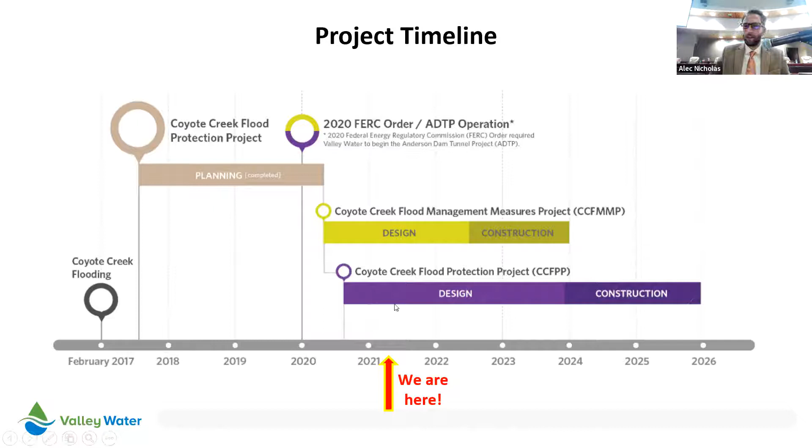So in the planning phase, we had several steps. The original was the conceptual alternatives analysis. We solicited public input and revised those into the feasible alternatives, which we presented to the public and solicited public input as well. We further revised those into the preferred project, which we presented in 3 different public meetings in June of 2020, last year.

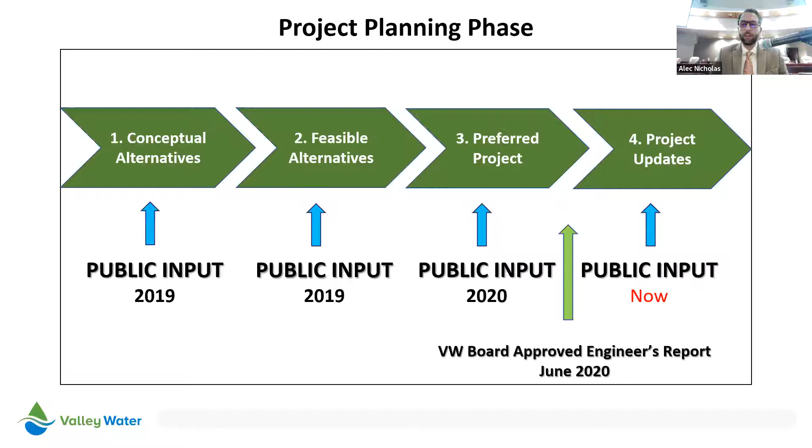Afterwards, on June 23rd, 2020, the Valley Water Board approved the engineer's report, and we have since begun the design phase of both projects. Today we'll be soliciting input on the current project updates and providing additional updates as we move forward.

So a quick recap, the Valley Water Board approved the engineer's report in June of 2020. Since then, we have also hired an environmental consultant, GEI, and a design consultant for both projects, AECOM, whose project manager I'll be introducing later. We have continued to work with multi-agency staff regarding other projects affecting the creek.

One notable agency is the City of San Jose, coordinating with their Coyote Creek Trail project. We have begun the preliminary design activities, including obtaining permission to enter from affected property owners who have flood protection elements adjacent to or potentially on their properties, in order to begin data gathering activities in those locations.

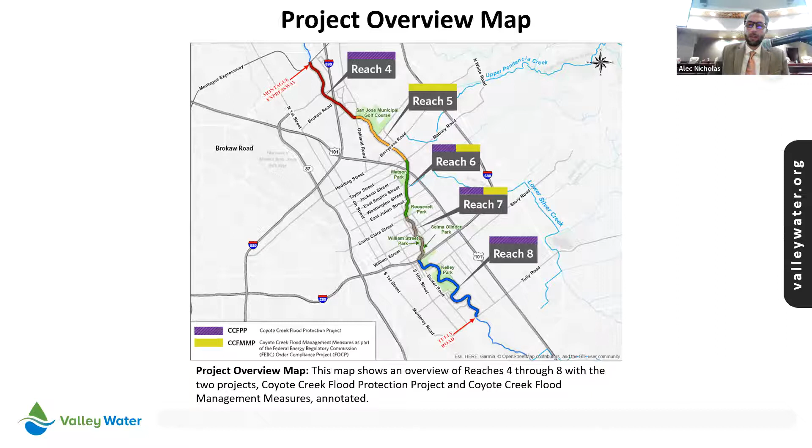So a quick overview of the project limits. The downstream limit is Montague Expressway, and the upstream limit is Tully Road. We have split the overall Coyote Creek project into 5 different reaches. Reaches 4 and 8 are noted in purple. All elements in both these reaches fall under the Coyote Creek Flood Protection Project, with a completion date of fall 2025. Reach 5 elements are all in the Coyote Creek Flood Management Measures project, which has a completion deadline of December 2023. And lastly, reaches 6 and 7 have a mix of elements in both projects.

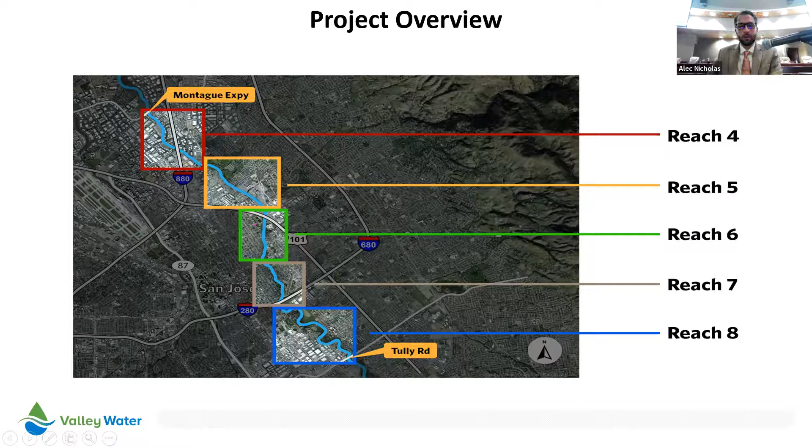Now we'll be delving into each reach a little bit to discuss some specific details. Reach 4: here we'll be using 2 flood elements. One, a flood wall that we have in orange on both banks, and across the roadway surface of Charcot Avenue, we'll be using a passive barrier.

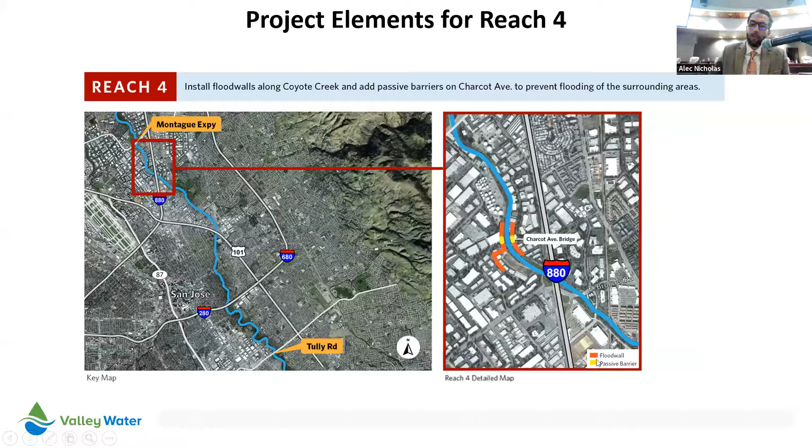Now, what is a passive barrier? It's outlined in yellow here, with a picture on the right-hand side. These normally lay flat across the roadway for cars to use the bridge. But during a flood event, as the waters overtop the bridge, the barriers will flip up under normal buoyancy forces and prevent the water from going up and down Charcot Avenue. The passive barriers will also be connected to the flood walls, both upstream and downstream of the bridge, to provide continuous flood protection in this region.

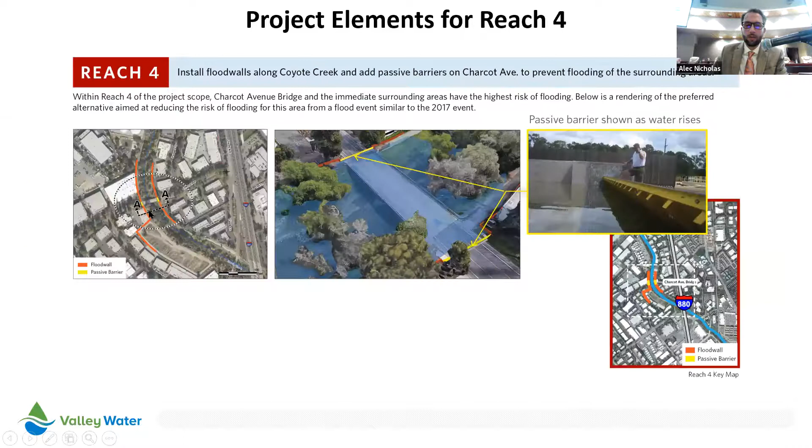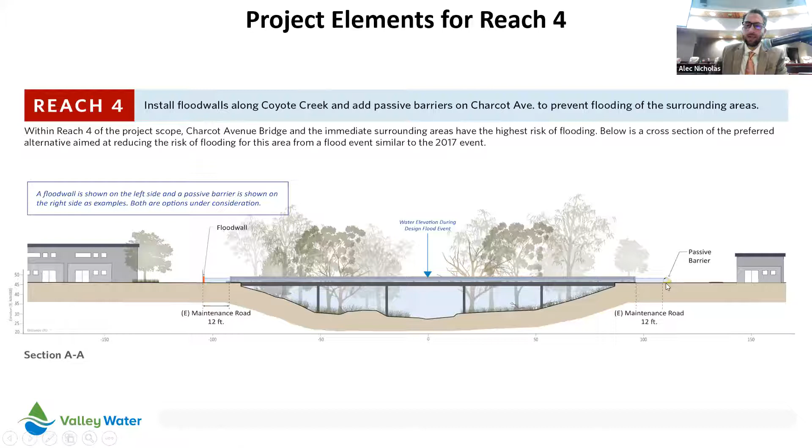Here's a cross section depicting what we would see if we looked downstream at Charcot Avenue. So we have the bridge, and we have depicted the flood wall on the left-hand side. This would occur before and after the roadway, not across it. Then across the roadway, we would have the passive barrier, shown in yellow on the right-hand side.

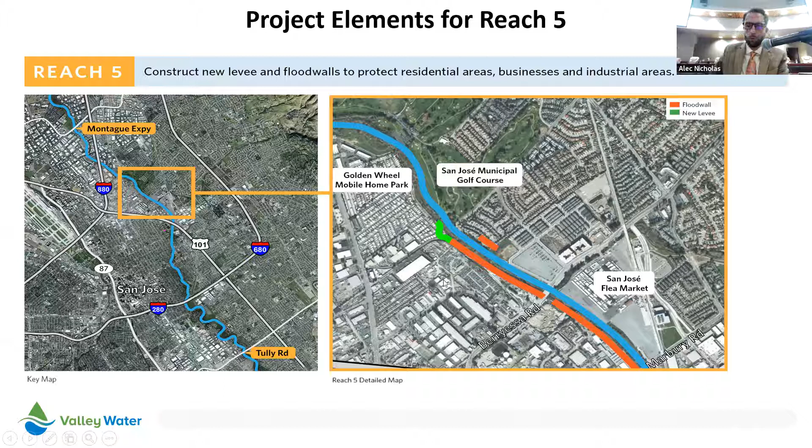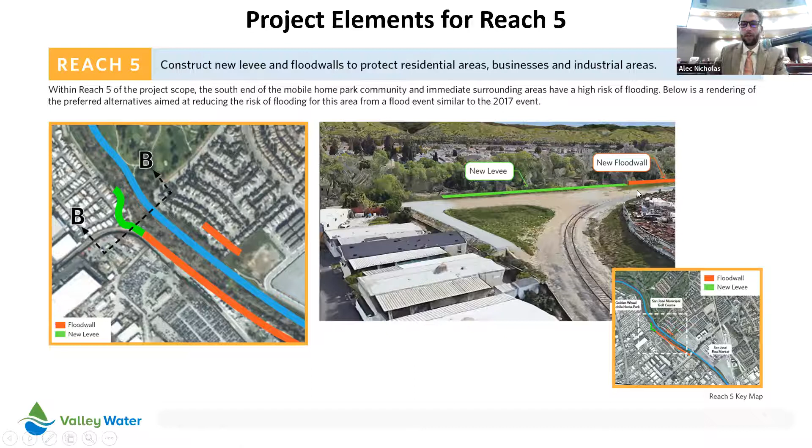Here's another rendering of where the new levee would go. The Mobile Home Park is on the left-hand side of the screen, and it'll be tied into the new flood wall going further upstream on the west bank along the UPRR tracks. A cross section in this location shows the new levee on the left-hand side, with the proposed water surface elevation, and the short flood wall providing protection to the residences along Notting Hill Drive on the right-hand side.

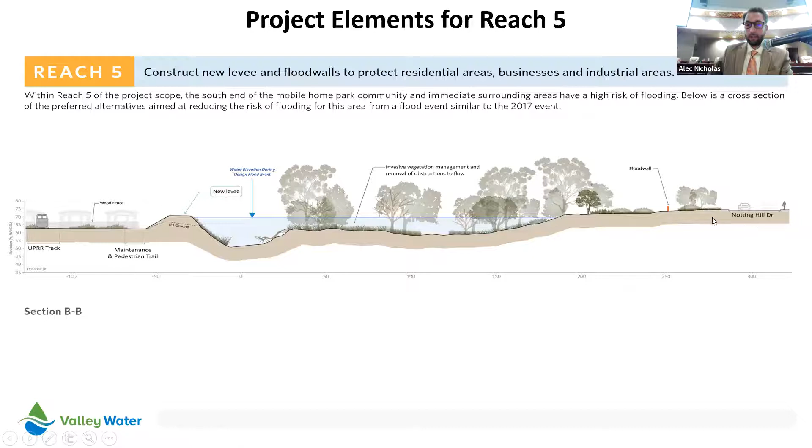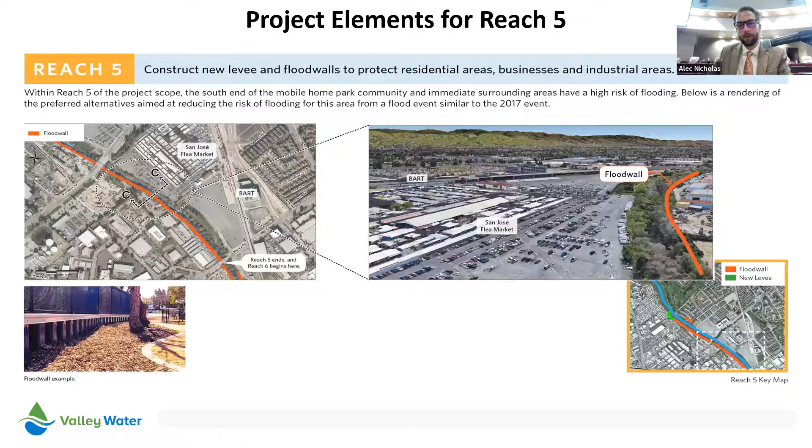A little bit further upstream, still in Reach 5, we have additional flood walls along the west bank of the creek. This is across the creek from the San Jose Flea Market and the BART station, and a proposed potential flood wall type is shown in the bottom left corner. For the eagle-eyed viewer, this is something many would recognize from Reach 8 near the Rock Springs neighborhood that Valley Water implemented after the 2017 flood event as an interim protection measure.

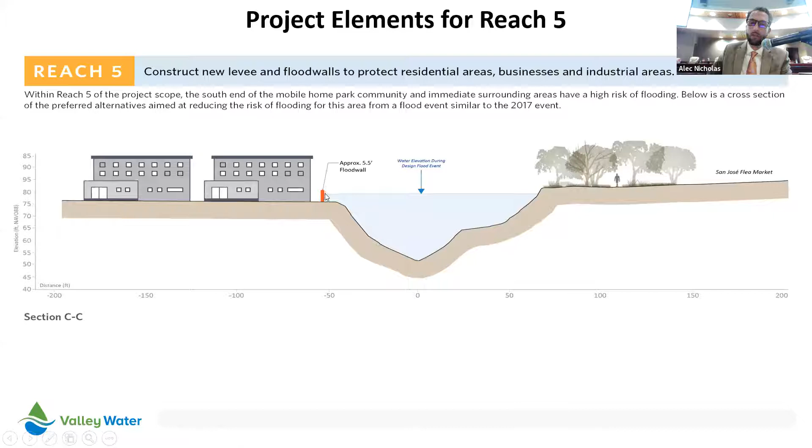Here's a cross-section of that San Jose Flea Market area. We would have the flood wall on the west bank providing protection to the commercial properties in that location.

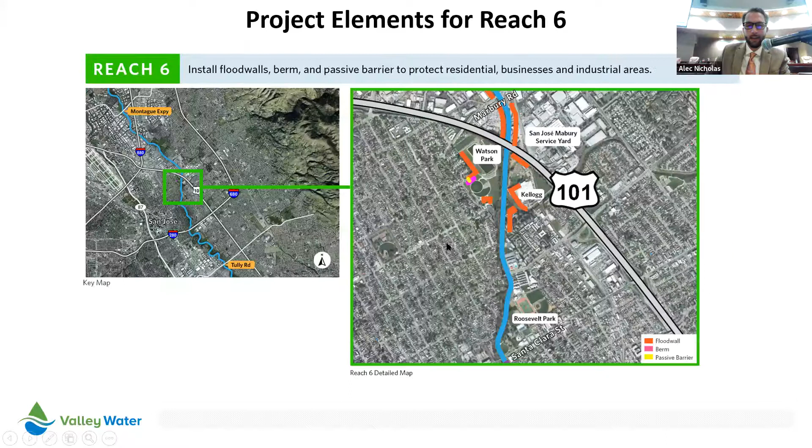The next section cut is in Watson Park, taken right where we have the passive barrier. Driving into Watson Park during a flood event, you would see the vegetated berm on the right-hand side providing protection, the passive barrier across the roadway surface on Jackson Street entering the park, and a flood wall running along Jackson and turning behind the residences on the left-hand side.

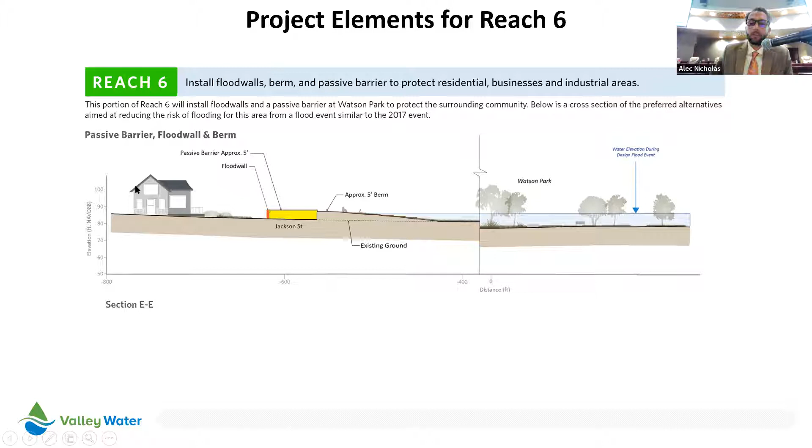During the planning phase, after soliciting extensive public input and considering the various alternatives, the two preferred alternatives identified for these low-lying homes were to either elevate the property or acquire the property and restore it to a riparian habitat.

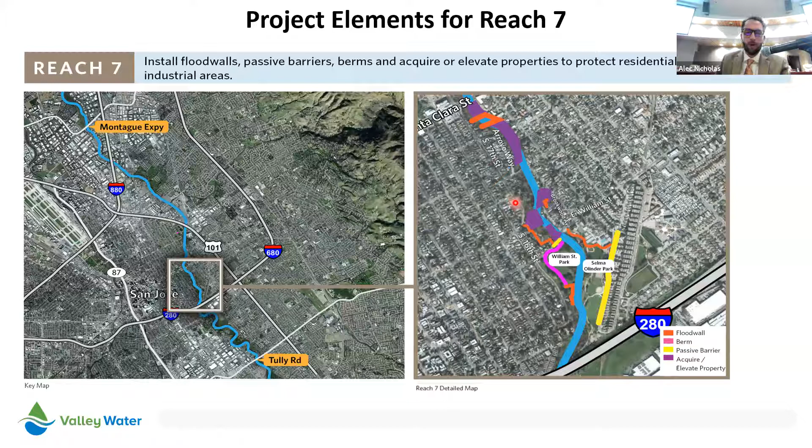This is going to be on a case-by-case basis with each property owner soliciting their preference, as well as a feasibility analysis during the design phase, once we have gathered the site-specific data for each property to be able to better determine the best solution.

Along William Street Park on the west side, we would have the vegetated berm. We show this in pink, potentially a terrace structure as well to provide some seating area for the public. On the east side of Selma Olinder Park, we have that passive barrier, specifically chosen to prevent any loss of visibility into the park from pedestrians, bicyclists, and also the residences that live right across the street from Selma Olinder Park.

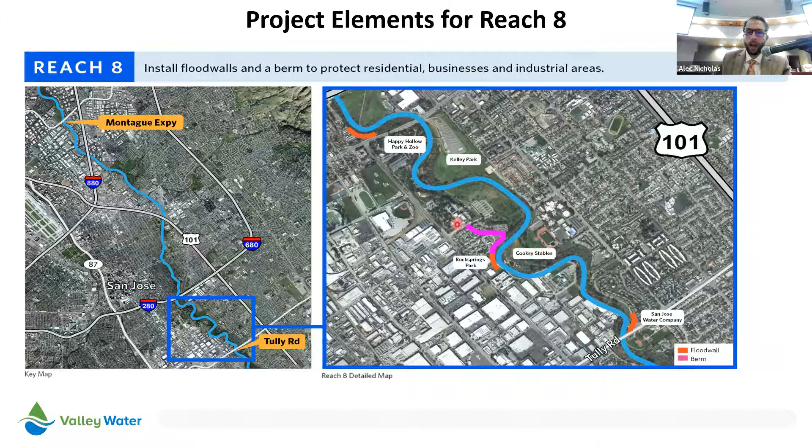Last but not least, we have Reach 8. Reach 8 has 3 flood walls as well as a vegetated berm near the Rock Springs neighborhood. The first location, near Happy Hollow Park and the 12th Street apartment buildings, will be a shorter flood wall on the west bank providing protection.

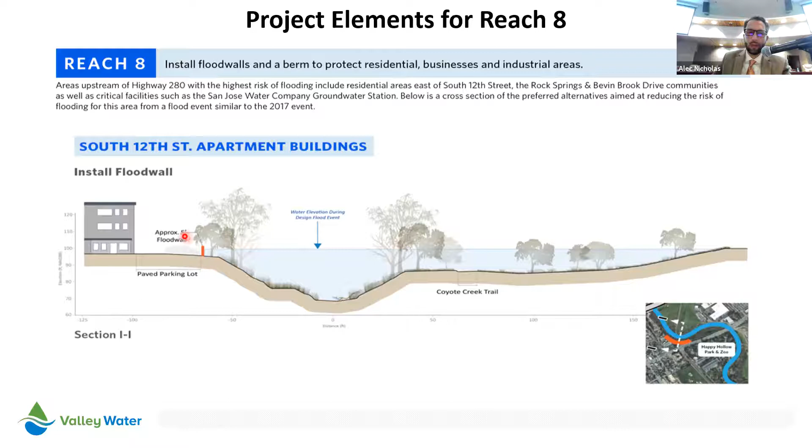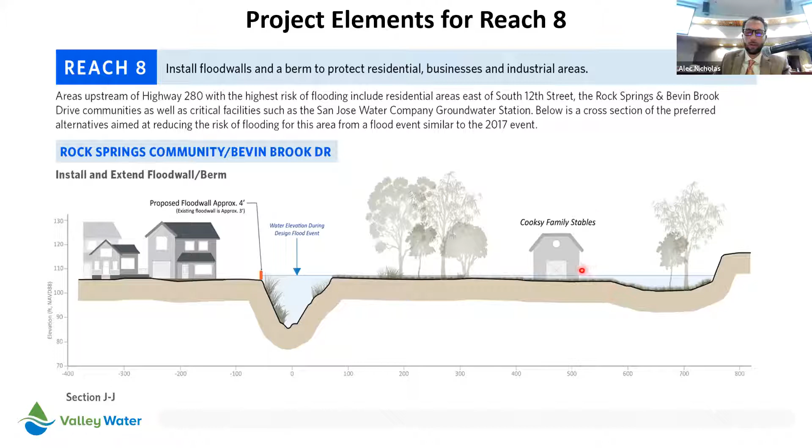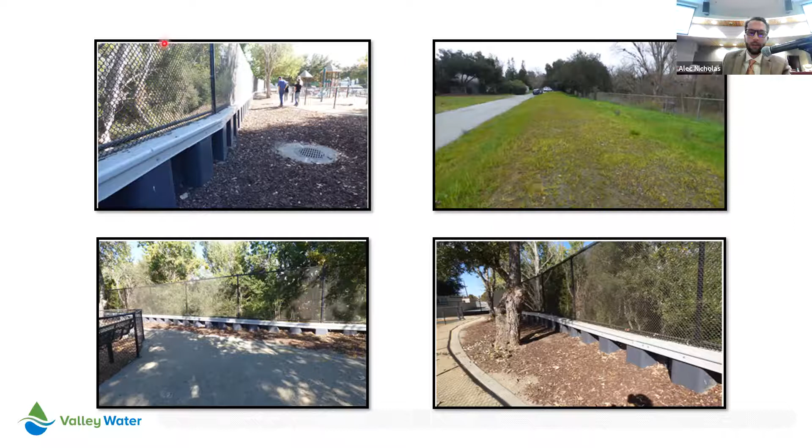Moving further upstream near Rock Springs, we will have a flood wall tied into a vegetated berm, across the creek from the Cooksy family stables. These are some pictures of the interim measures constructed after the 2017 flood event in this Rock Springs neighborhood - the flood wall and the berm that was constructed afterwards. These would be replaced by a new berm and a new flood wall.

And last but not least, we have a shorter flood wall also near Tully Road to provide protection to that intersection, as well as the San Jose Water Company groundwater station.

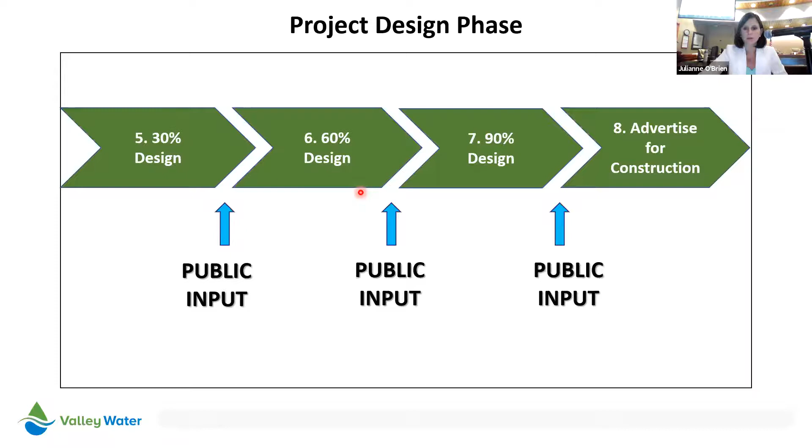So, current and future project activities. Right now, as I mentioned, we're in the preliminary design phase, the 30% phase. We're gathering data, beginning to work on the design criteria and technical design memo, reviewing the existing right-of-way, and continuing our study into elevation or acquisition for those selected properties. This began in summer of 2020 and will continue throughout the fall of this year, for both projects.

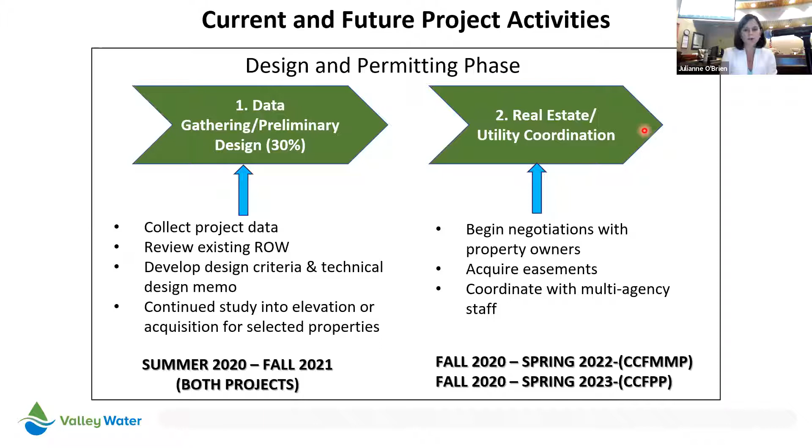Concurrently, we're also working on real estate and utility coordination. This means we're working on negotiations with the property owners, for both easements and for properties that will be acquired, and we're also coordinating with multi-agency staff. This began primarily in the fall of last year for both projects, and for the management measures project will continue through spring of 2022, and for the flood protection project will continue through spring of 2023.

Then the next steps will be environmental permitting, which takes approximately 18 months, and then the rest of the design phase for both projects, the 60 through 90% design, which will take approximately 12 months. Then lastly, we'll advertise for construction. For the management measures project, this will occur in fall of 2022, and for the flood protection project, it is anticipated to occur in fall of 2023.

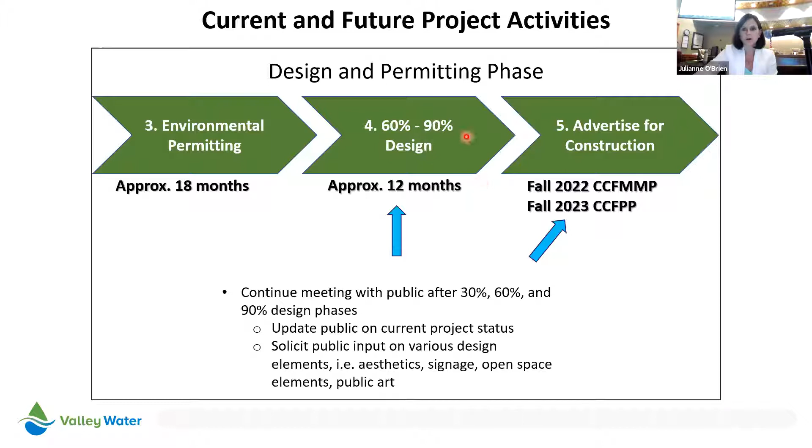As mentioned in one of the earlier slides, we will continue to meet with the public at the completion of the 30%, 60%, and 90% design phases. We'll use that opportunity to update the public on current project status, as well as solicit public input on various design elements, such as aesthetics, signage, open space elements, and public art. For individual homes selected for either elevation or acquisition, we'll have more frequent meetings with those particular owners to update them on their progress.

So as I mentioned, we're in the data gathering phase. For owners on the call who were part of the management measures project, this is probably going to look familiar to you because we've already done that. For owners on the flood protection project, this is a heads up of what is coming. The site reconnaissance is a 30-minute visual exterior inspection to include photo documentation, and it takes approximately 30 minutes.

The hazardous substance liability assessment is an approximately 1 hour visual exterior inspection to identify any potentially hazardous materials on site. This is to protect not only the public and community, but also construction crews during the construction phase of the project. This allows us a chance to mitigate or manage those materials prior to construction.

Topographic survey is a 1 to 2 day assessment, depending on the size of the property and the measures proposed for the property. This consists of topographic and other survey measurements, including elevations of features.

Then the biological assessment is again a 30-minute visual exterior inspection to document any biological resources for environmental impact purposes. This allows us to be aware of what's already on the property so we can hopefully design around it, or be aware of what mitigation efforts we will need to provide for any impacts.

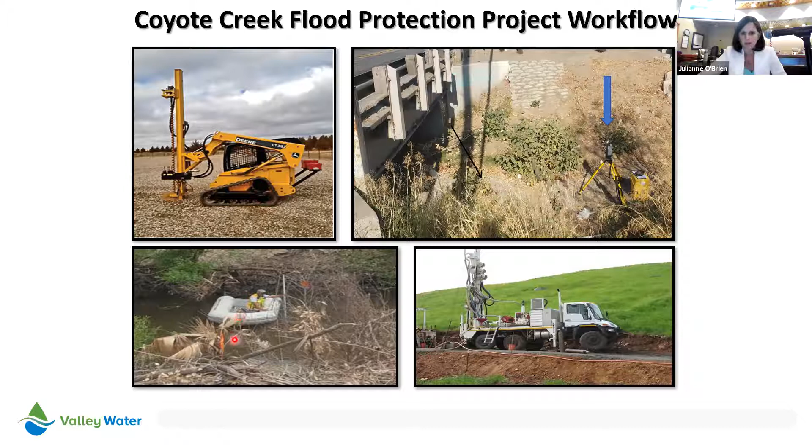Updates on the home acquisitions and elevations. We did recently purchase 4850, 60, and 70 South 17th Street in a voluntary sale from a willing seller. We are currently continuing to gather data on the feasibility analysis of elevation for the remaining properties selected for either the elevation or acquisition option, and we will continue to work with each homeowner individually. It's not a one-size-fits-all solution.

Updates on the next public meeting. This will occur at the completion of the 30% design. Once that is complete, we will have the next round of public meetings, likely later this fall of 2021. We will have 3 separate meetings, similar to last summer, one meeting per district, allowing us to dive deeper on the specific elements impacting those areas. Meeting details will be provided on the website once finalized, and you'll also be notified via flyer and Nextdoor, similar to how you were notified about today's meeting. That website is www.valleywater.org/coyote/creek.

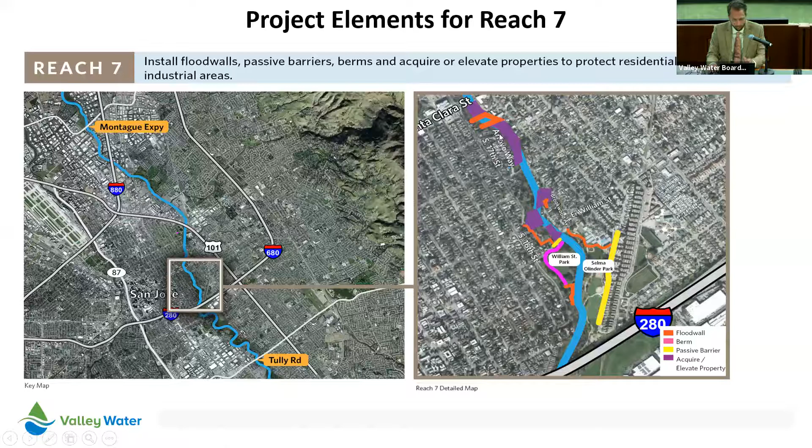Great, thank you. So the next question is from Irene. Since berms can hide people and trash buildup, will Valley Water regularly maintain the condition of the berms? Is this type of cleanup in the budget?

So I'll respond to that one—excellent question about security. Actually, one of the FAQs on our website, specifically FAQ number 16, deals with this specific question. We did take security into account, especially along that long vegetated berm along William Street Park. It will be of sufficient height that SJPD patrols can easily look over the berm to assess any security risks in the park.

Regarding maintenance, since that is City of San Jose property and park, that'll be an ongoing agreement that Valley Water and the City of San Jose will need to execute to determine operations and maintenance after the project is complete. Thanks, Alec.

Yeah, no worries, no worries.

Jeffrey Hare asked the question: if a property is deemed to be unsafe for an owner-occupied structure, how is it deemed safe to be rented? And how does renting a structure prevent homeless camps?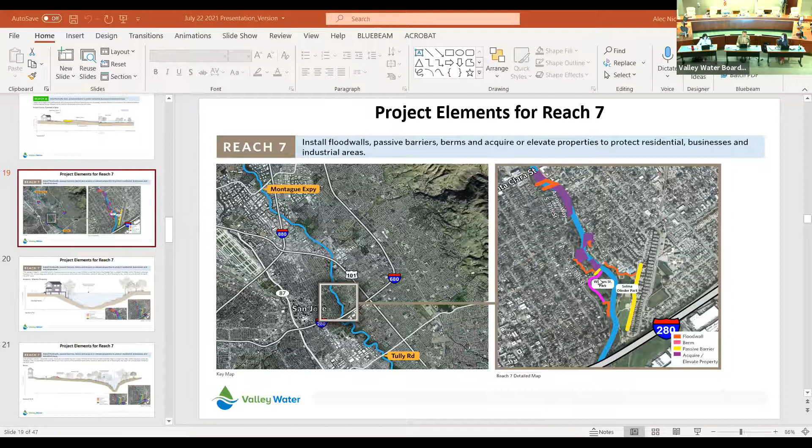We'll need to bring Valley Water's hydrologist back into the meeting for this next question. Michael is asking: is the hydrologist saying the creek within the channel will rise higher than in 2017 during a 20-year flood?

This is Jack again. No, what I'm saying is the project is only designed for a 20-year event, but what FEMA cares about is typically the 100-year event, the base flood elevation—those are the regulations in the CFR. So imagine there's a 20-year water surface elevation contained within the levees and berms, but the 100-year water surface is even above that, over the berms, because the water surface is higher. In that case it doesn't become channelized, and we're not raising the water surface—it just means the whole area becomes a larger pond. So the floodplain will look like the FEMA regulatory floodplain, not what flooded in 2017. Does that answer your question?

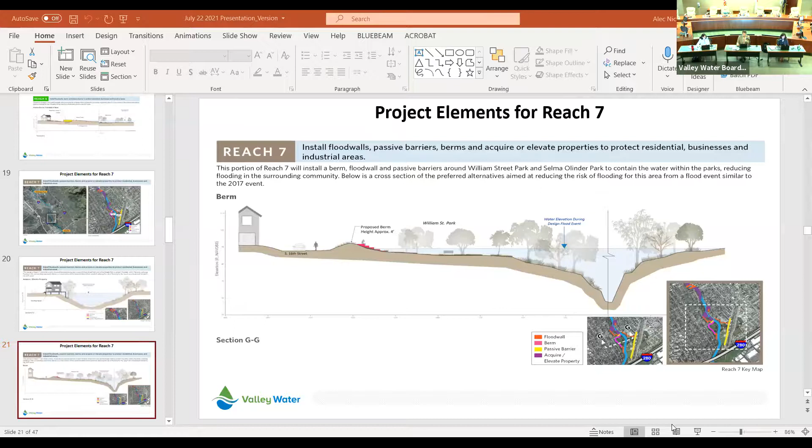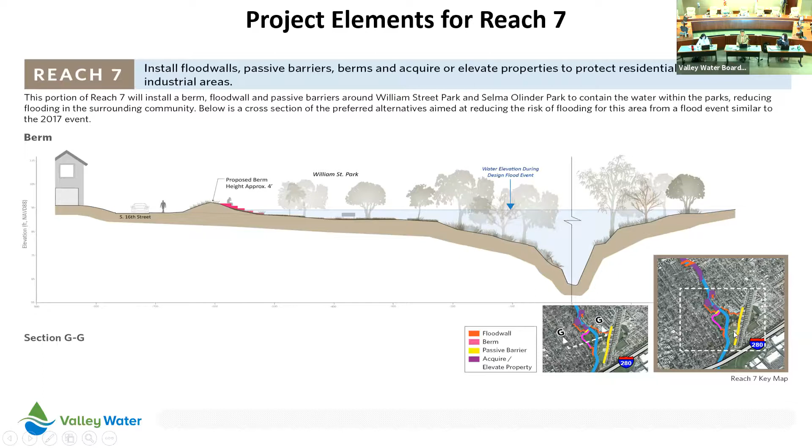Let me share my screen. Here is a cross section - let me go back a couple of slides. We have William Street Park on the left and Selma Olinder on the right. This cross section is on the William Street Park side. We would have that vegetated berm we've been discussing along the west side, along with a flood wall towards the southern tip. On the right side, Selma Olinder Park would be protected by the passive barrier running along the street here.

Another question Valley Water has included in its FAQ: acquiring or raising the 10 or so individual properties along Coyote Creek is a costly and invasive mitigation project for a very infrequent flooding event. Most, if not all, of the properties have been through several flooding events to date and have been restored to full functionality at a small fraction of the cost of buying or elevating them. Why is there no option for Valley Water to provide much lower cost funding for relatively rare property repairs?

Oh, you want me to go?

Okay, there's a couple of reasons for that. Number one, the risk of flooding is always going to be there, especially with a 20-year return period, which is pretty frequent compared to a 100-year storm event. There's also an extensive amount of damages that were repaired after these flood events, specifically after the 2017 flood event. So it is quite an expensive endeavor to not potentially raise or acquire them as a flood protection solution.